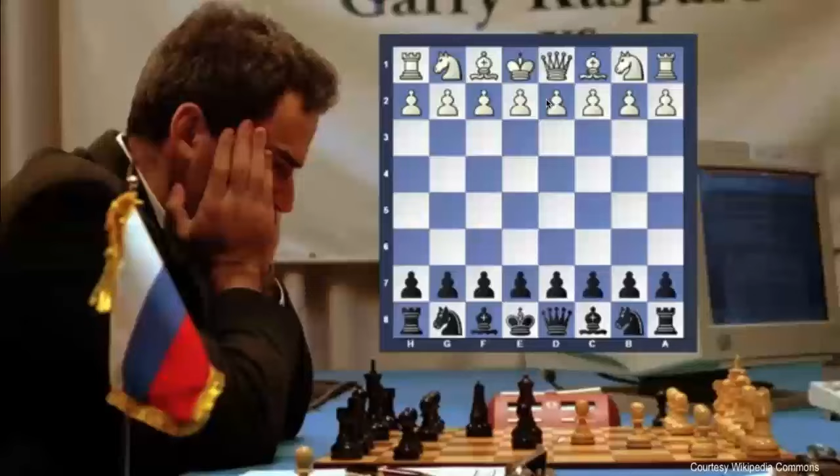Just wondering if anybody recognizes this gentleman. I would be very surprised. So let me give you a little bit of a hint. This is the same gentleman, and now we have a little bit of context. You might have figured this out. The setting is 1997, and a very significant match between Garry Kasparov, the then world chess champion, and IBM's Deep Blue computer.

To me, this was a very significant event because, as many of you know or could guess, the outcome was that for the first time in history, a computer defeated a chess world champion in tournament play. What that really meant to the computing world was that we now had a new respect for the power of the computer. Up to then, everybody understood that computers were good at math and could do repetitive tasks, but I don't think many people gave the computer credit for being able to accomplish things that required any form of creativity or thinking. I think this event really changed the mindset of a lot of people in that regard.

But I'd really like to give IBM a little bit more credit than what the documentary did that was entitled Man versus Machine, because in truth I see the IBM side of this, or the Deep Blue side of this, as a very strong collaboration between the IBM programming crew and the hardware team. So I think a better phrase would be man and machine.

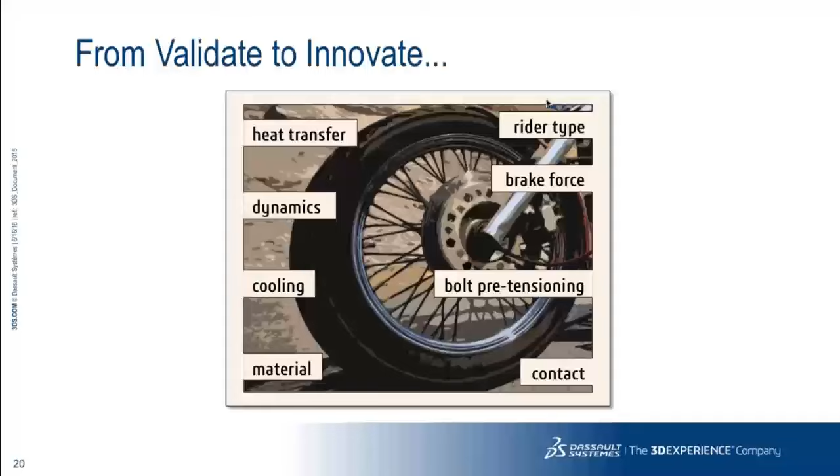We're using Abaqus to study the heat transfer, looking at the cooling, the brake force, the loading—all these different aspects of the design, simulating the performance. But we're also studying things like the warranty; we want to understand the warranty exposure with this design. We want to look at weight and cost, and the manufacturability of this. We have all of these features we want to study, and we can do all of that manually.

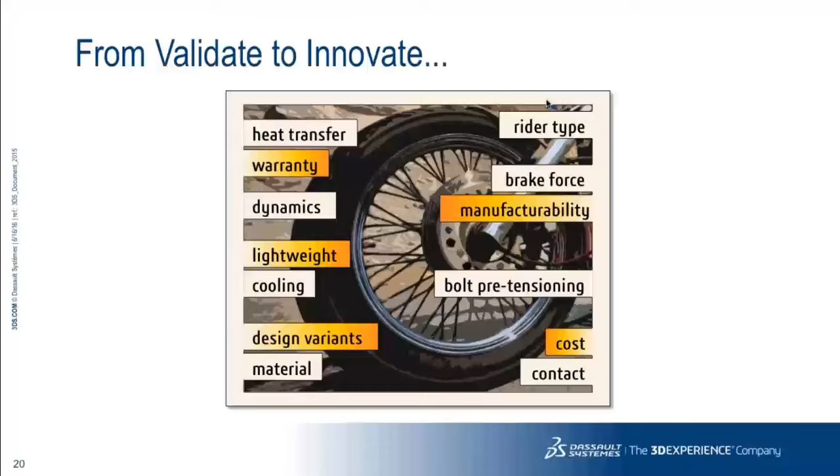What we really want to be able to do is look at all of these aspects of the design quickly enough that we can pour through many, many designs searching for that best design. That means we really have to begin to look at automated processes and other ways of getting through designs very quickly and efficiently.

So we'll be looking at using Abaqus as the foundation of the physics, and we're going to look at Abaqus and Friends to try to improve the throughput of the simulation.

In the video, we've actually made good use of the products: Abaqus for the physics, Isight for process automation, process integration, and parametric optimization. Also FE-Safe for the durability calculations to make sure that we have a robust product that will serve the intended use. And we'll also explore how we use Tosca for topological and shape optimization as well.

So those 4 products are going to be highlighted here, and they're special in another sense because if you have extended packaging, you already have access to all of those products. Abaqus, Isight, Tosca, and FE-Safe all draw on the same interactive tokens or compute tokens for solving, so they really share a pool of tokens.

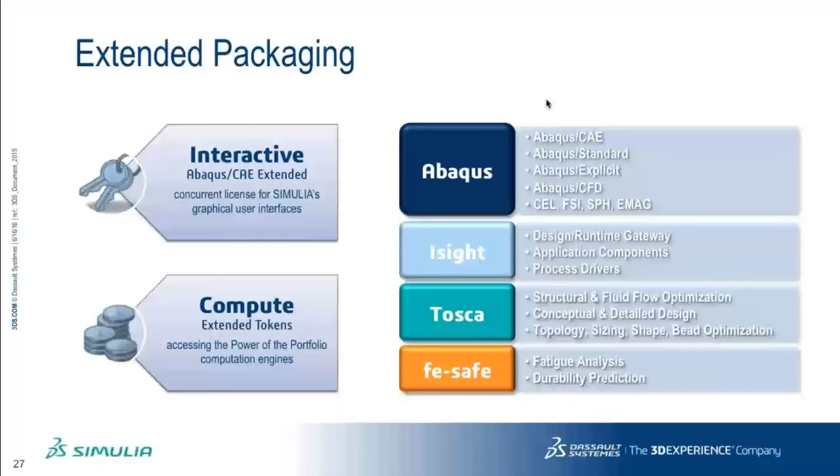As I said, those of you who have extended packaging today already have the ability to make use of all of these products. So now we're going to walk through in order Isight, Tosca, and FE-Safe and how they've contributed to developing this brake rotor.

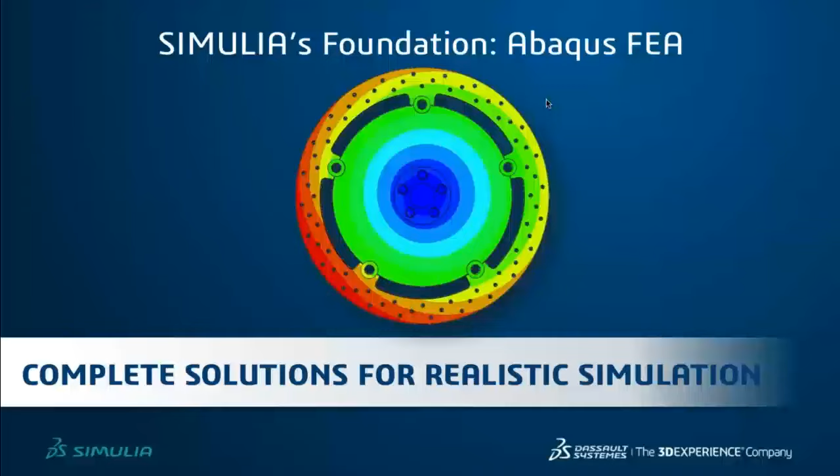So beginning with Isight, in this part of the development, what we're going to do is look at the brake rotor, the brake disc, the outer portion of it. We're going to use Abaqus to basically do all of our simulation, and so we've developed a model of this within Abaqus CAE.

Some of the components: we have a carrier that essentially supports the disk and is essentially attached to the wheel. And then also notable is the fact that there are 5 buttons that actually are the only way that the disk is attached to the carrier, and that's to allow for thermal expansion differences between the 2 pieces.

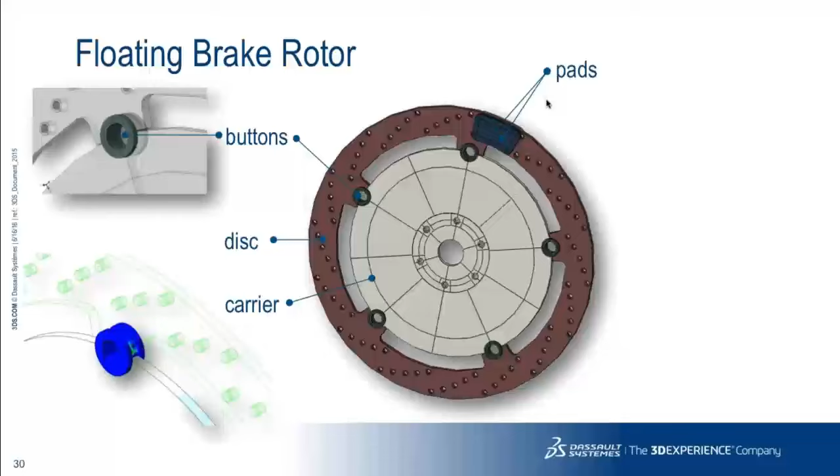All of the torque is transmitted through there, so the contact is an important part of that to provide the torque transmission and really to secure the pieces. So we have that as an important part of our design consideration. The brake pads are what's producing the drag on the disk to slow the bike down.

In running the simulation within Abaqus, what you will see is that we have switched the frame of reference, whereas normally the pads would be held still and the wheel and disc and carrier would rotate. In order to visualize easier, we're going to actually change the frame of reference to the disc and carrier so it appears that the pads are actually rotating around the system.

So you'll see that throughout this presentation. It's really just so that it's easier to see the results of the simulations. In the upper right corner you see a structural model of this, and it's showing the asymmetrical loading that's occurring.

We're also looking at the vent holes and doing a thermal simulation because we're also very concerned about the performance of the disk. We'll study that in more detail.

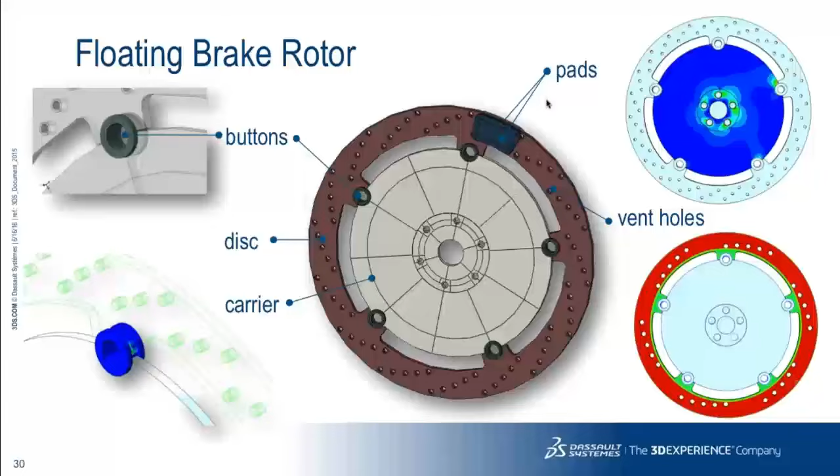Now, what we would like to do is to be able to look at many different variations of this design very quickly and efficiently. So we've created a Python script that will automatically create the model within Abaqus CAE. A fairly common way to do this would be to just manually go in and create this disk in Abaqus CAE and then use the replay file as a starting point for your script.

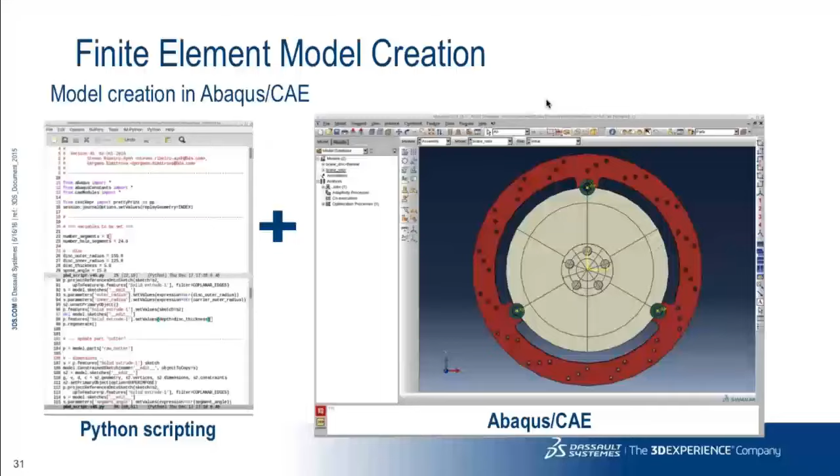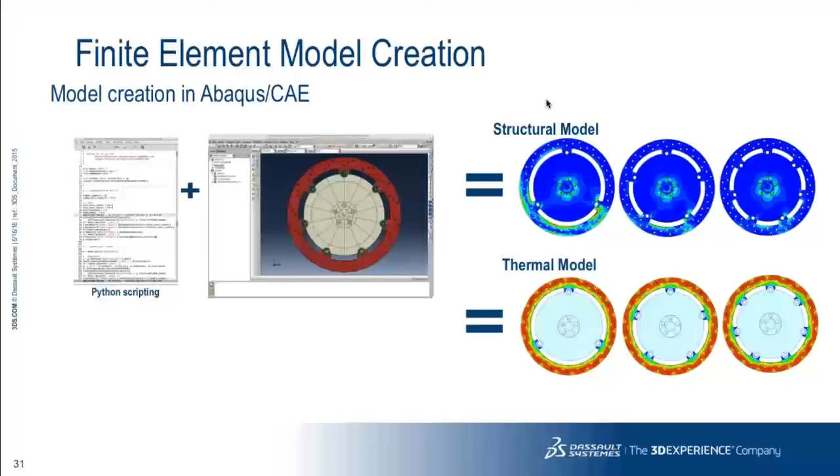Once we have the script in place, we're ready to essentially automatically generate a structural model and a thermal model by running that script. We can run it multiple times and look at different designs in 3-button, 5-button, 6-button configurations. We can really look at any number of designs that we want. So we've essentially built the foundation for automating this process.

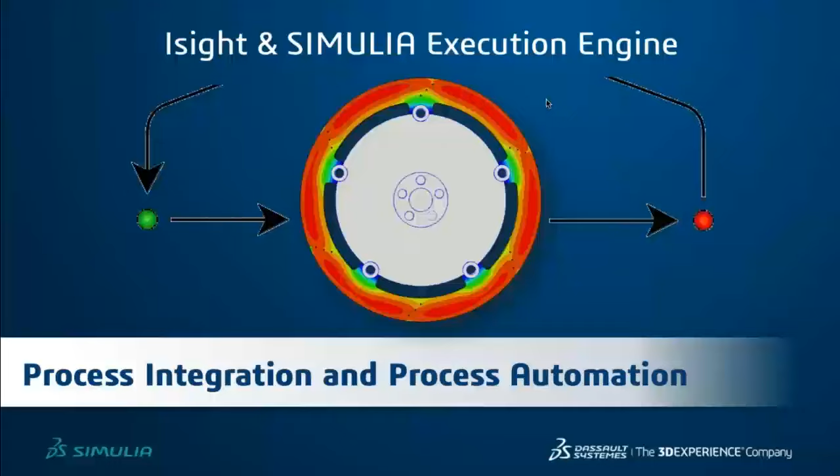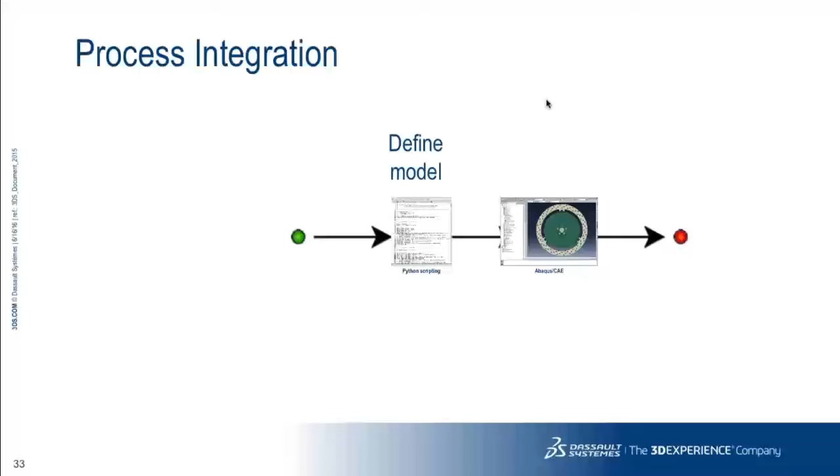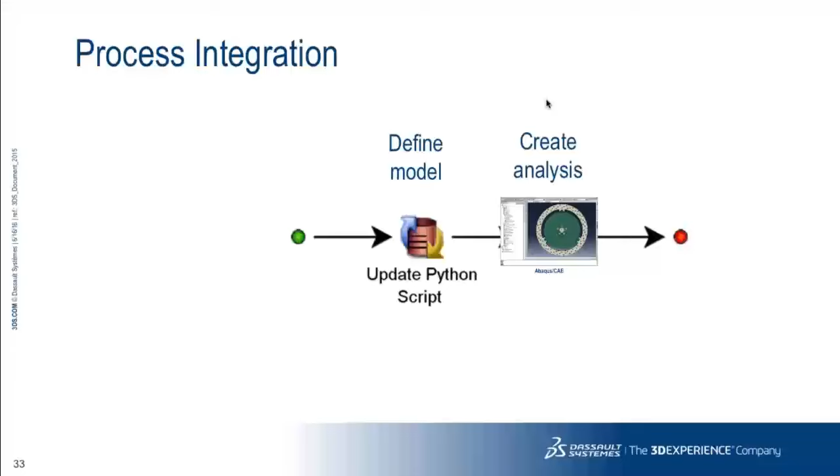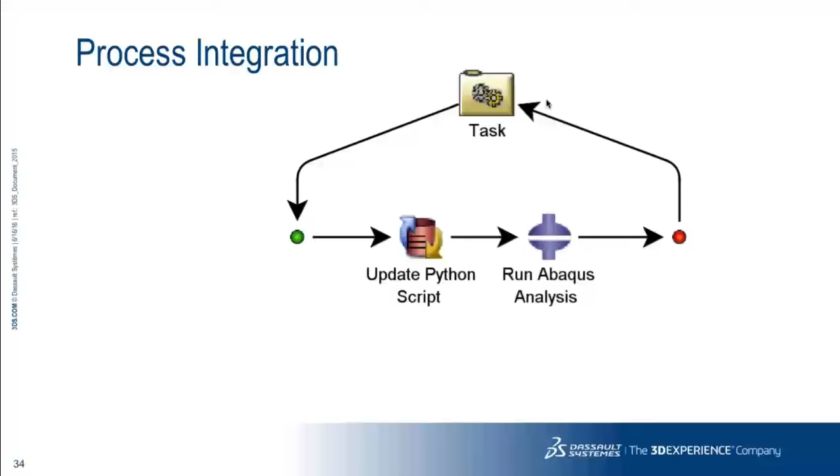So now we will employ Isight together with our script in the Abaqus CAE interface to begin to automate this process. Where we have the Python script that defines the model and Abaqus CAE to create the model, we're going to bring these into Isight and simply replace the Python script with the update Python script component in Isight, and Abaqus CAE with the run Abaqus analysis component within Isight. Then we simply bundle that into a task, an automated task within Isight, and that essentially allows us to automatically generate all the designs that we need.

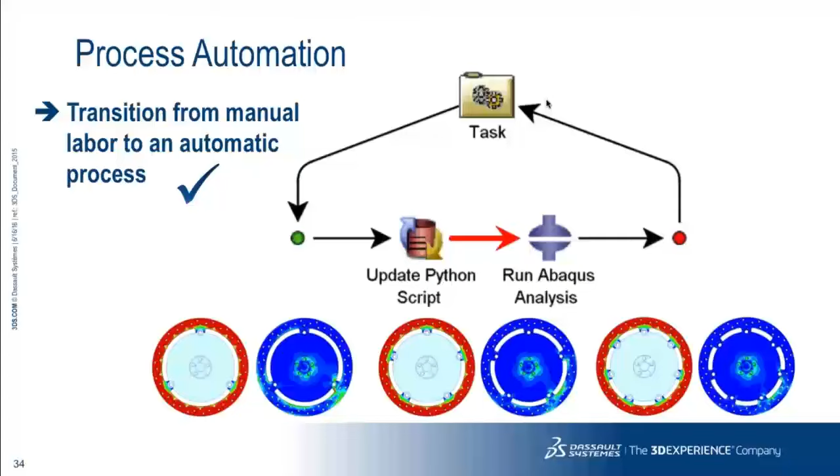So that can just essentially, without user input, we can generate any multitude of designs that we need. But we want to have a little bit of intelligence incorporated into this design process, and so we're going to use the optimization algorithms within Isight.

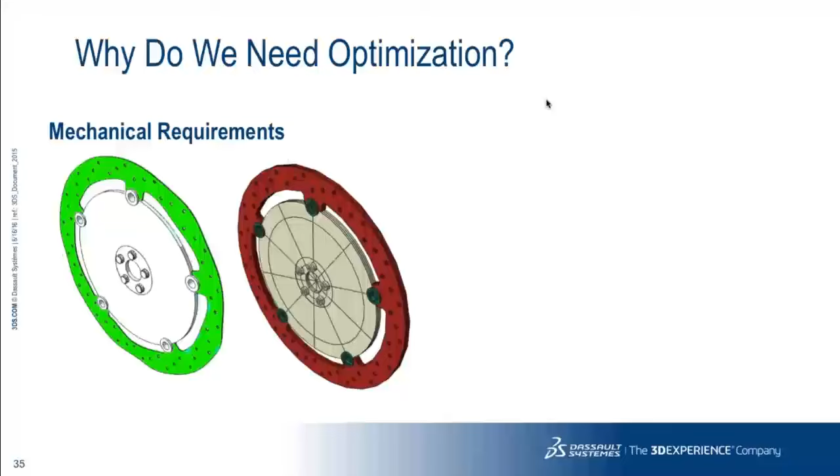I think it would be easy for people to say, why do we really need optimization? But its purpose is to help us balance competing objectives. For instance, in terms of mechanical requirements, we want it low cost and low weight, but if we go too thin, we risk having a disc that's going to warp or fail prematurely. If we make it too thick, it's heavy, more costly, and not an attractive design.

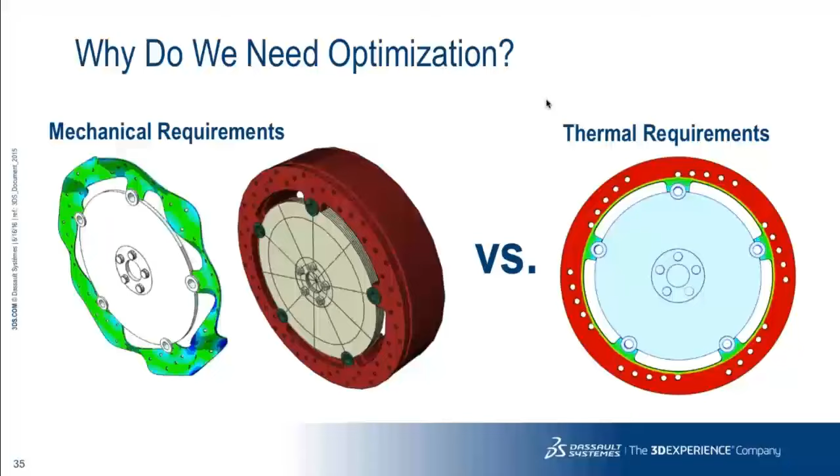So we have this delicate balance that we need to strike, and we can use the optimization algorithms to find that perfect balance. In terms of thermal requirements, we have similar problems. We need to look at how we best configure the holes and how we meet the objectives needed for the design from a thermal standpoint. So we have the ability to look at both mechanical and thermal requirements as we develop the design.

With the mechanical and thermal requirements in mind, we can start to look at different variations of the geometry. We can look at different sizes for the holes, a different number of holes, and a different pattern or position for the holes. So we have these many different possibilities that we have to sort through.

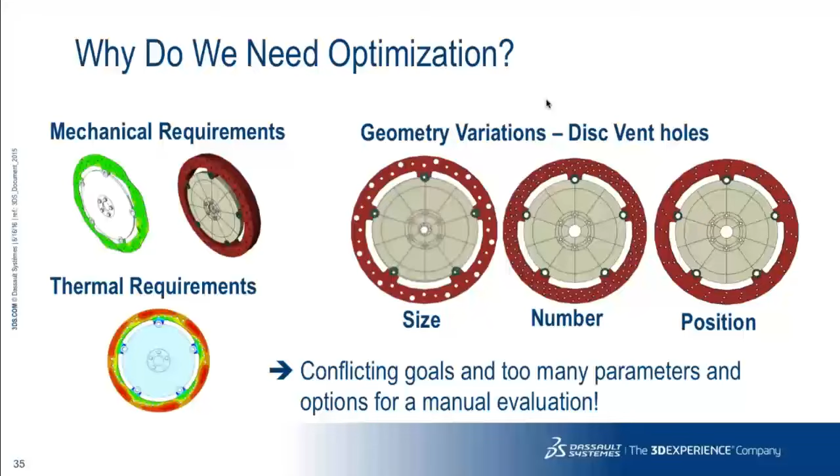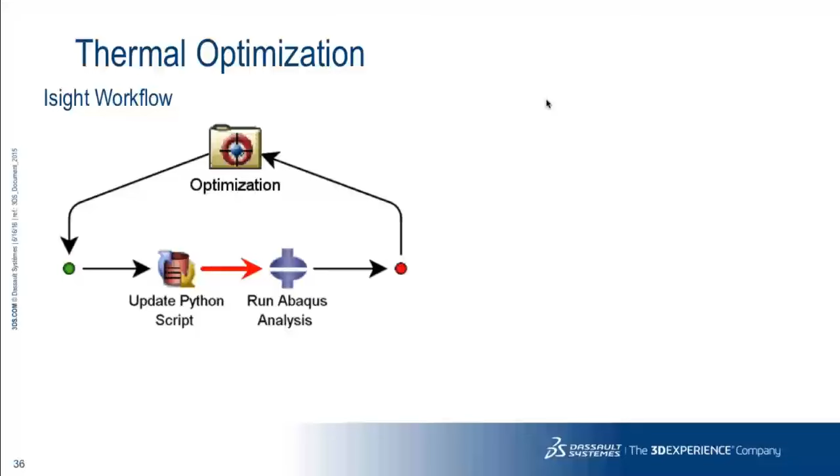Very quickly it becomes a challenge to manage all of that information manually, both from a file management standpoint and just in terms of keeping track of results. So what we're going to do is introduce our automated process and simply replace the task component with an optimization component. It's very simple to turn that automated process into an optimization algorithm that will move the design toward improved mechanical and thermal functionality.

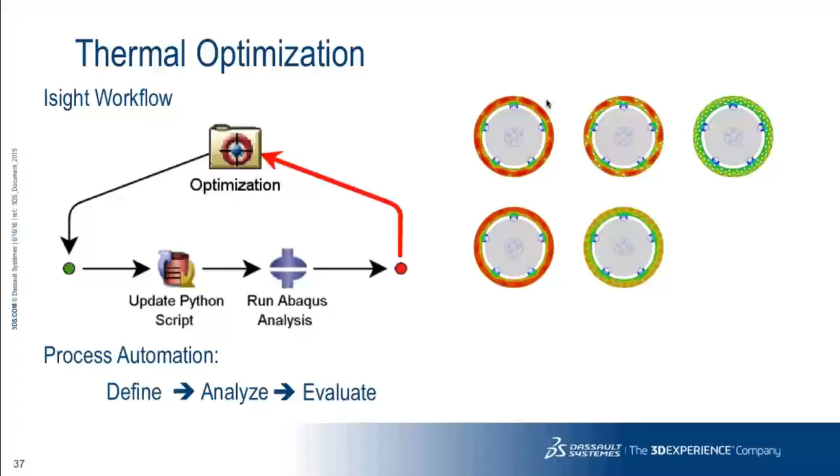So we use that to automatically drive through a number of different designs, looking at results from different hole size, pattern, number, different thicknesses, and all different variables of the design. And then after we've produced a number of designs and run through the analyses, we want to be able to quickly identify which of the designs is our best option.

Isight gives us many different tools to post-process that information. For example, in the correlation table we see here, we're able to look at the way the number of holes correlates with cooling area. What we see is a positive correlation, basically saying that as we increase the number of holes, we increase the cooling area, and that's a favorable trend.

But if we look at the number of holes versus brake area, we have a negative correlation, which is understandable. As we increase the number of holes, we reduce the braking area. So we have these competing objectives that we have to make sense of.

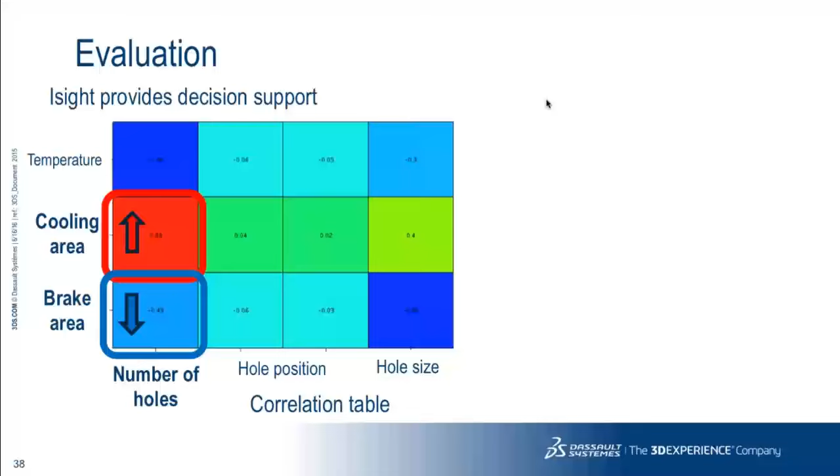So we look to a different type of post-processing within Isight to help us further, and that's a scatter plot. In this scatter plot of all the various designs considered in the design process, we can look at brake area on the y-axis and cooling area on the x-axis, then look at different regions of this plot and rule out the lower points that represent insufficient brake area. After removing those points, we're very quickly able to find the optimum point where we have acceptable brake area and the maximum cooling area.

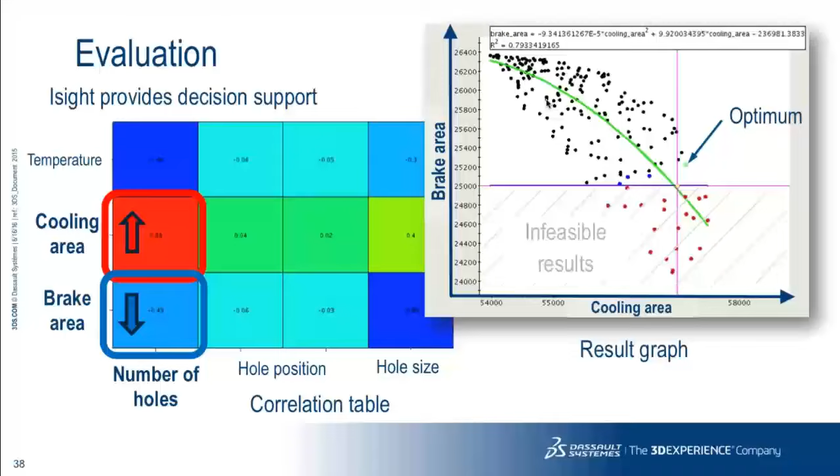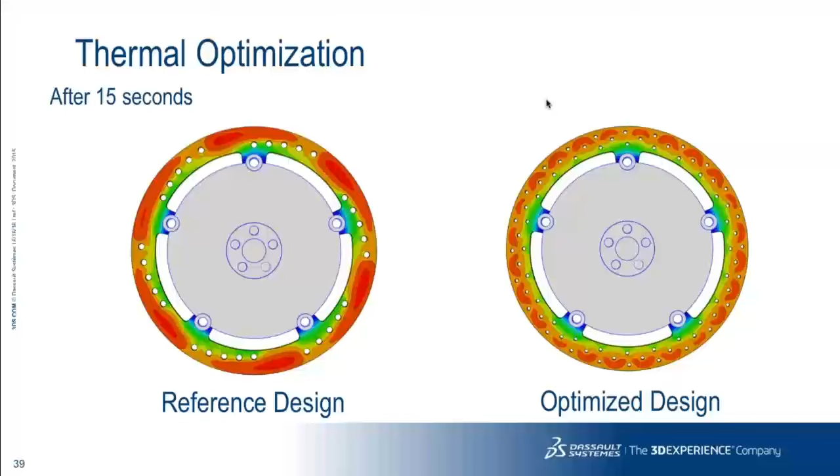What we see is in the reference design that was originally recommended by the designer, we have points of high temperature, whereas those corresponding points in the optimized design are at significantly lower temperature. We also have local hotspots in the reference design which contribute to warping and other undesirable effects, whereas in the optimized design we have a much more homogeneous distribution of temperature.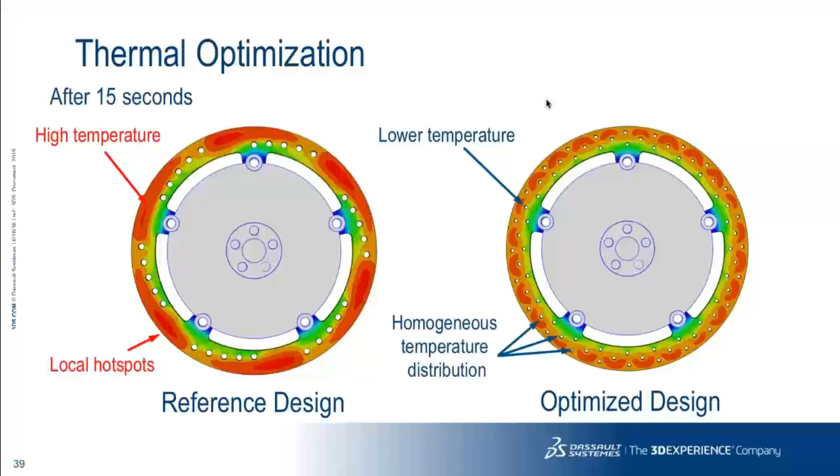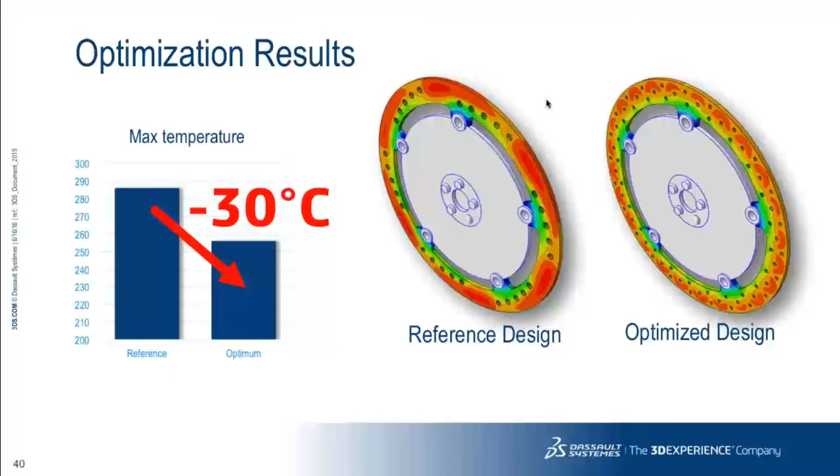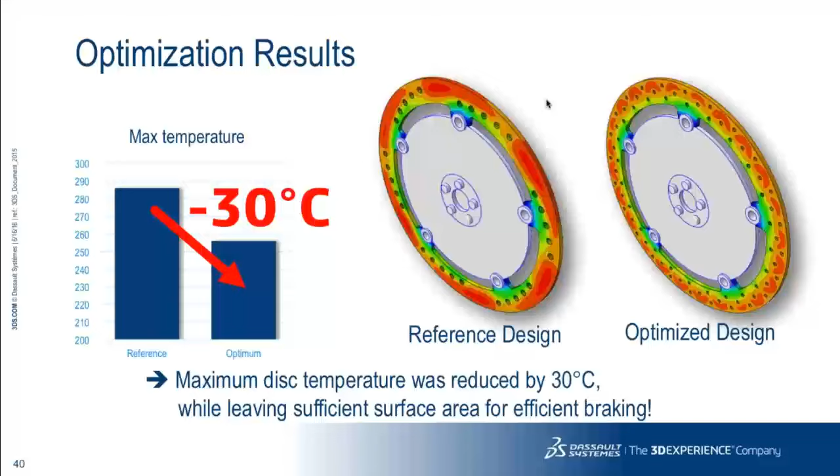In summary, by taking advantage of the optimization algorithms and searching through many different designs, we were able to drop the maximum temperature by 30 degrees centigrade while maintaining sufficient braking area. So these are the types of things we can do using optimization algorithms coupled with process automation that can go through many design increments at the same time. This is the brute force method that the computer can employ. It can look at everything and find the best option.

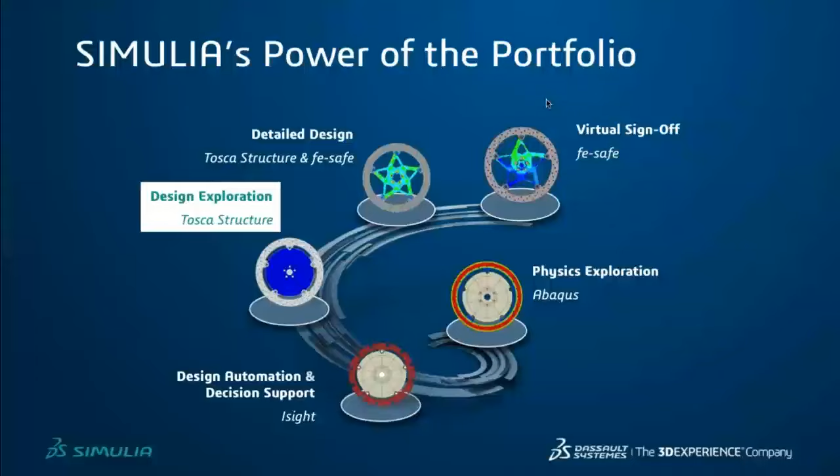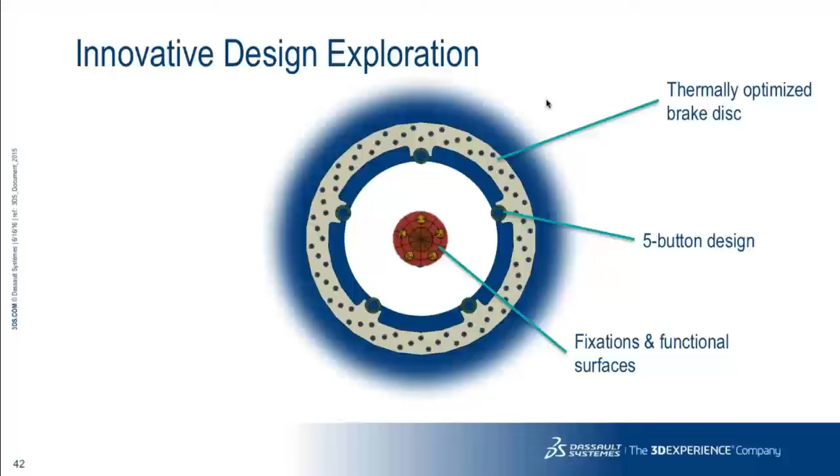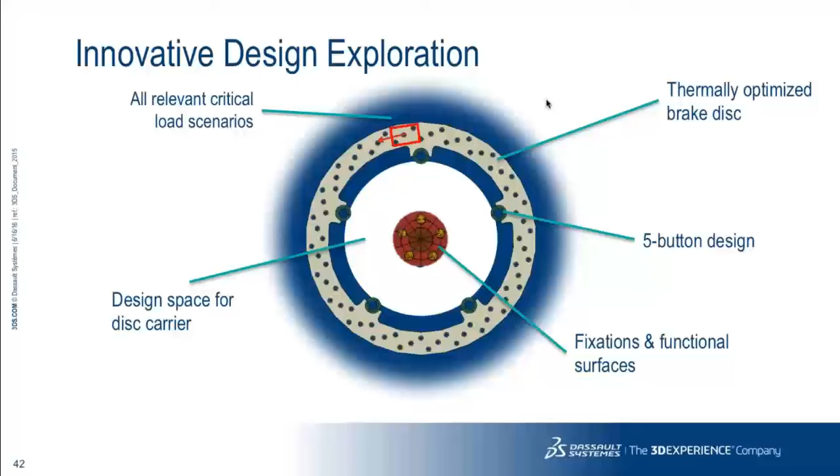Now I'd like to move on to the process we used to come up with the carrier design, and we used Tosca for that. At this point we have an optimized brake disc - we just went through that, and we chose the 5-button design as the best option. We know that the carrier is connected to the wheel at certain locations in the center, and we understand the loading coming in through the brake pads and the brake disc. So what's left over is the design space in between the two, which is what we have to work within to come up with a carrier design.

For that we're going to use Tosca and employ a technique called topology optimization. This uses simulation technology, the machine part of it, where algorithms can find designs that are very efficient in terms of using stiffness and stress well, combined with the engineer's input that sets up all the boundary conditions and gives us the real estate available for the optimization to occur in. So it's really a good picture of collaboration between man and machine here.

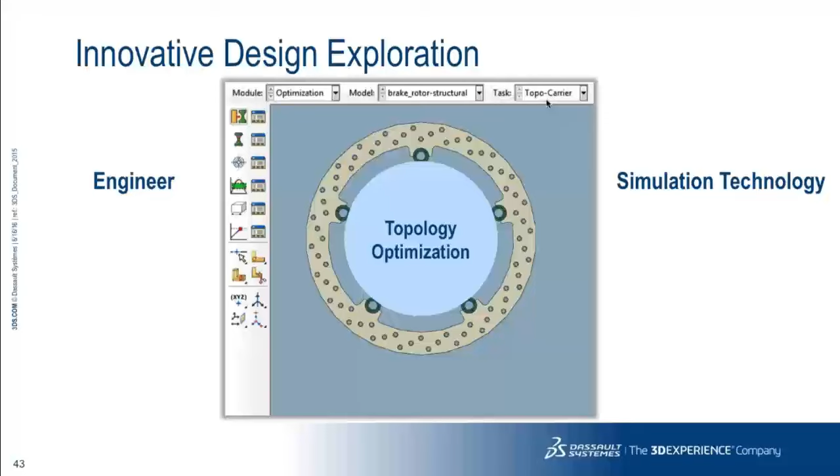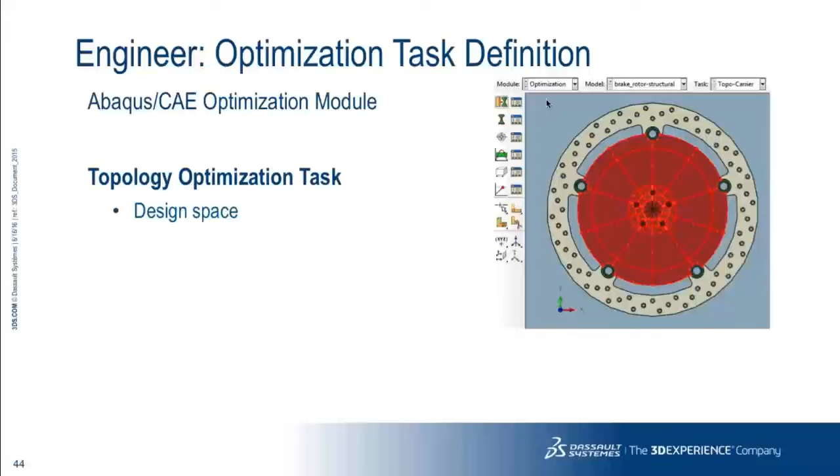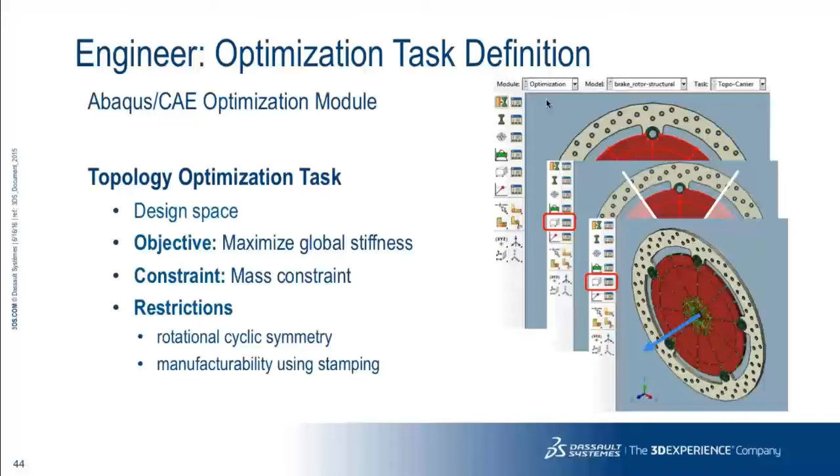We'll take that into Abaqus CAE to set up this optimization, and that task consists of specifying the design space we have to work with, and then defining the objective - what are we trying to accomplish in this optimization? Here we'd like to maximize our global stiffness, and our constraint is to reduce the mass and make this a lightweight component. But at the same time, we're also able to impose other restrictions within the optimization process to make sure we have cyclic symmetry in this case, or also to make sure this is manufacturable through a stamping process. So we have the ability to impose these manufacturing and design restrictions in the process as well.

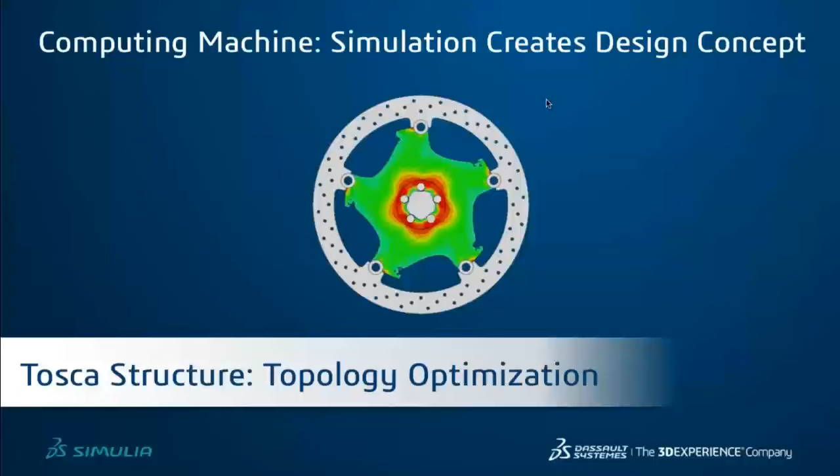Once we have that set up and begin to run the analysis, that's when the magic really happens. What Tosca does is it looks for material within that design space which is not being utilized and simply removes it. It results in the shape you see here, which initially is not what we probably would have come up with in our minds, but after reflecting on it, you start to realize that it really does make sense. That's a common occurrence with topological optimization - after the fact it makes sense, but it's rarely what you would have imagined ahead of time. That's really the power of Tosca and topological optimization.

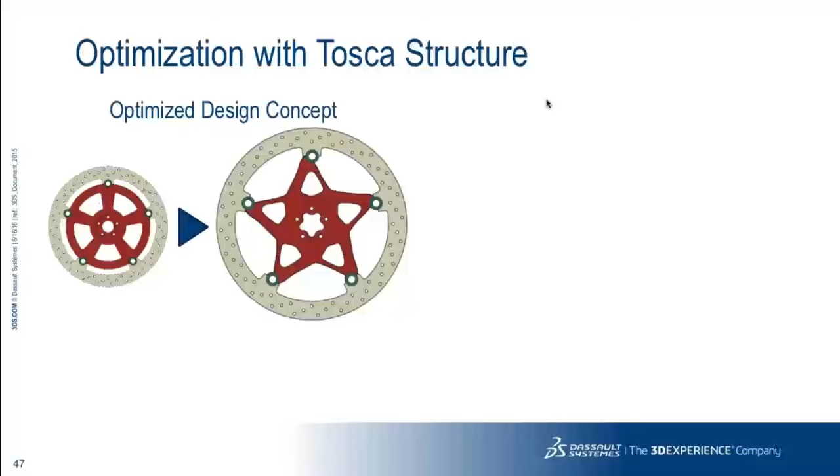So basically what we've done here is moved away from the traditional design for that carrier. We've used Tosca to come up with this novel design based on algorithms that make strong use of the material, and the result was a weight reduction of 30%, while at the same time it's actually twice as stiff as the original design. So we've really demonstrated the power of the algorithm here.

Now, one thing I want to point out is that with Tosca, the optimization is based on nonlinear results. The simulation behind the scenes is fully nonlinear analysis, and that's critical because it allows you to respect the difference between tension and compression. There is no way to carry tension between the button and the carrier, and it's important that we respect that, because when we use linear results, we're basically tying the two together, and as you might imagine, it then relies on tension between the carrier and the button, which is just not realistic. So it's critical that you have the opportunity to use nonlinear capabilities within your development of a design, especially where contact is involved or any large displacements.

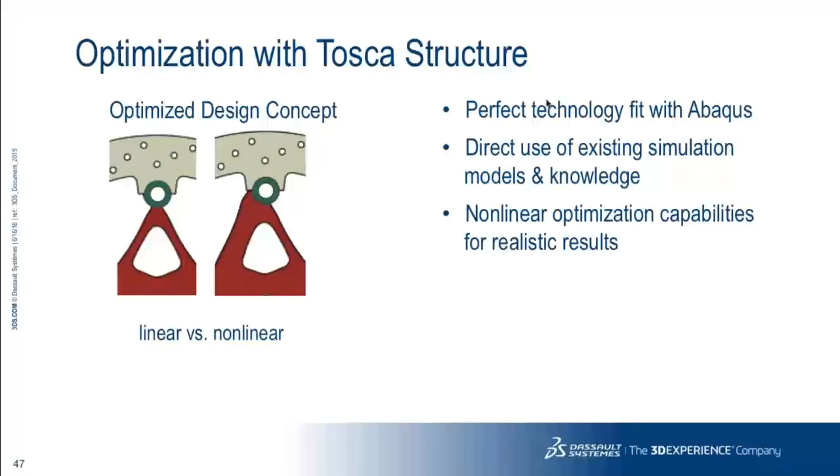It's really the same as choosing to use nonlinear analysis in any simulation versus linear analysis - you understand the limitations of linear analysis, and those apply equally to topological optimization. And then finally, we also have a design that we know we can produce from a stamping process, so we've covered that as well.

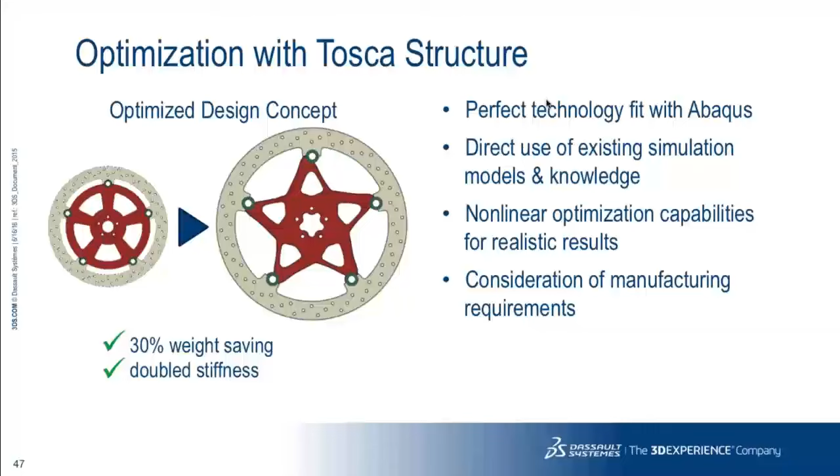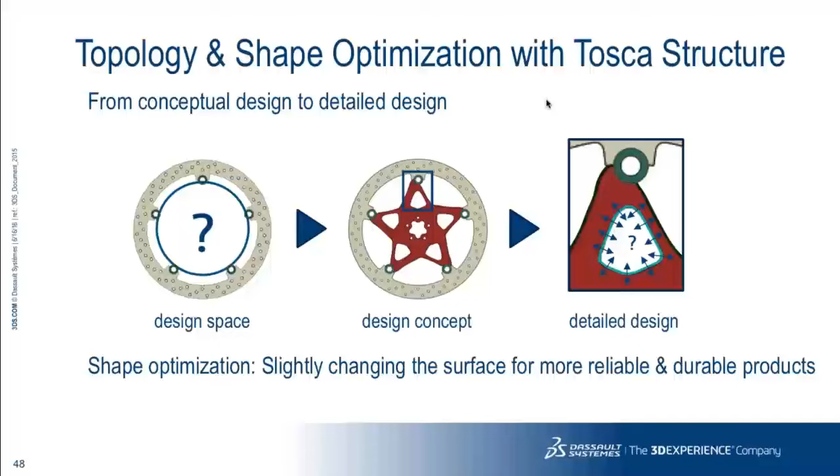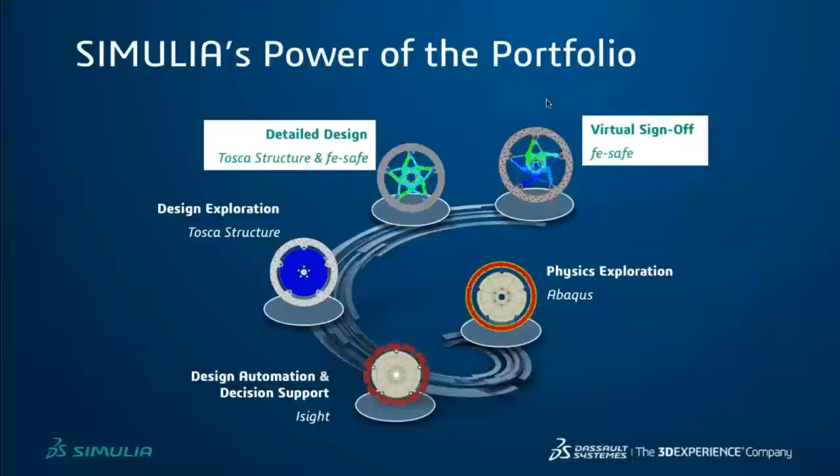So just as a review, we essentially started with a design space. We said this is the real estate that we have to work with. We used Tosca to come up with the design based on stiffness, but we're not done yet, because we want to continue looking at the detailed design and make sure we have not only the right stiffness, but a durable design as well. That takes us to the next step, where we'll use fe-safe to do a durability assessment of the design. Actually, it's even better than that — we're going to use Tosca in combination with fe-safe.

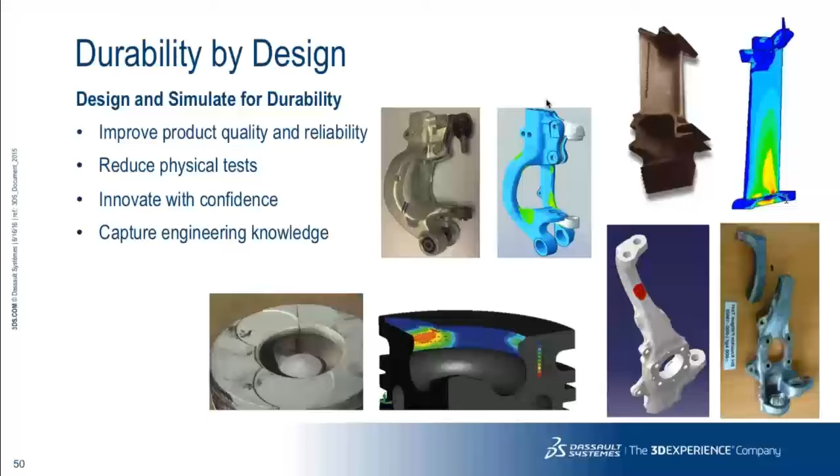But let's first talk about durability. What we're shooting for is to make sure we have products that have the life our customers expect, that we have quality. We want to minimize the warranty claims that we have. We want a design that's robust under any number of conditions, and that really points to doing a fatigue assessment of your designs.

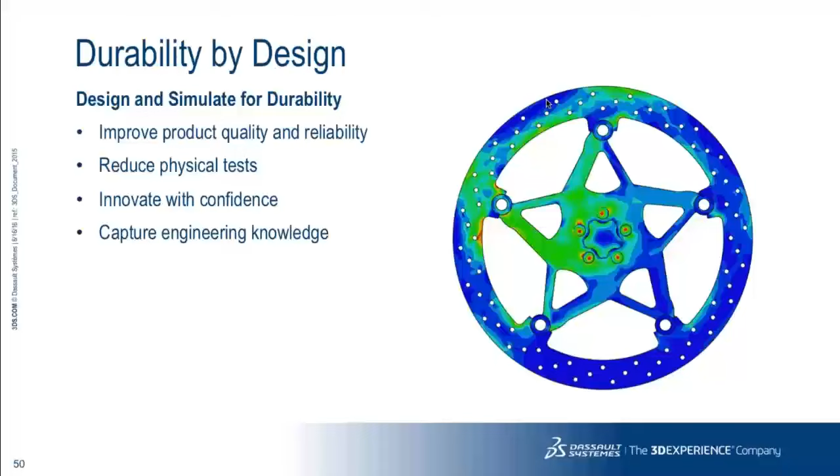Now, an important thing to note is that fatigue is the result of a local stress value, and this is where shape optimization really becomes a critical part of the life prediction process.

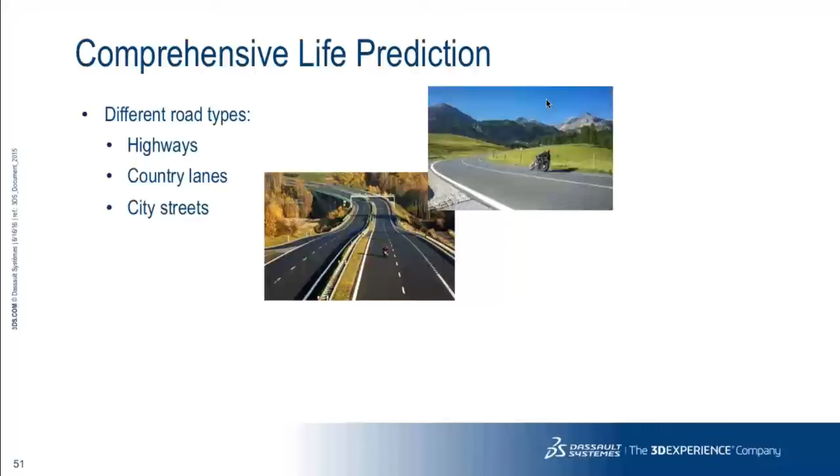As we predict life, there are a number of different factors we have to bear in mind. First, for this brake rotor, the motorcycle is going to spend its days — some on highways, some on country roads, others on city streets — and those all contribute to the fatigue of the part differently, which we need to account for when predicting its life.

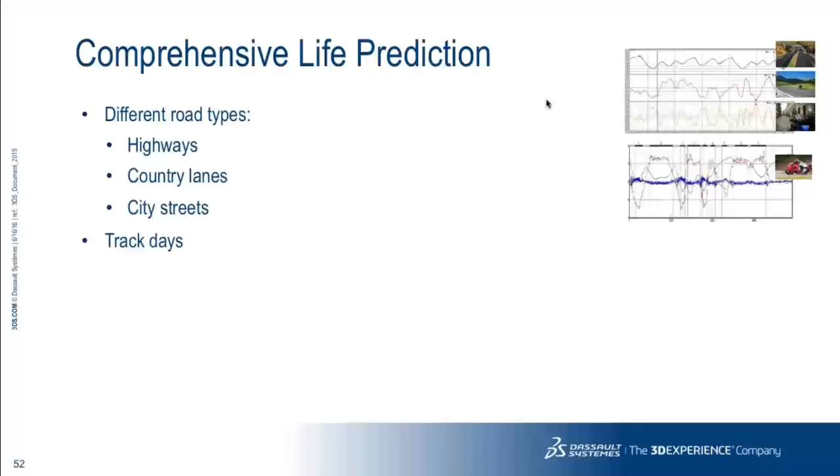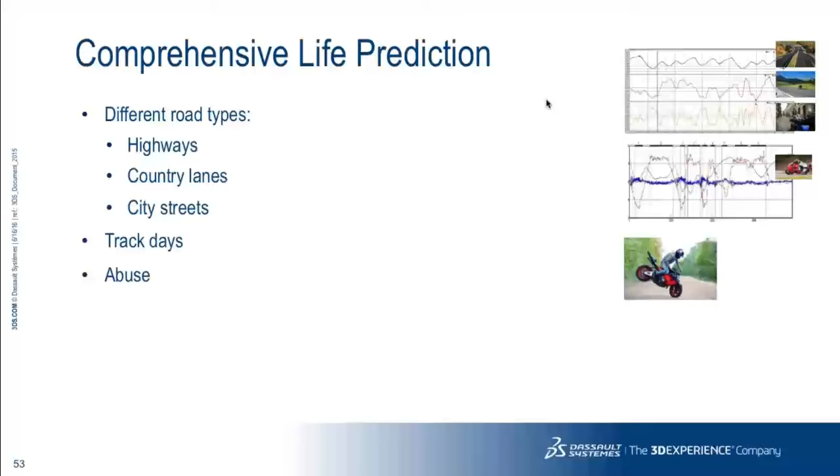We also may take this to the track only a couple times a year, but those are very damaging events — they have such significant loading that they also have to be considered in predicting the overall life of the part. And then there's the impact that other non-intended use might have on it, since we're again trying to contain warranty costs.

We also have touring bikes and sport bikes, and different types of customers, and the way they ride will impact the life of the parts. We want to use that information to understand what the service life should be given these different conditions for different riders and uses. We can essentially use FE-Safe as a tool to help make estimations of the service life we should expect from that product under those circumstances.

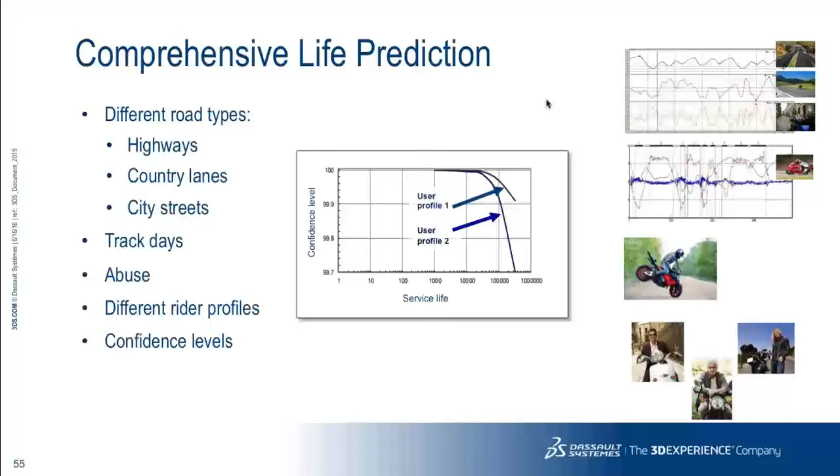So in the brake rotor, what we've done is combine FE-Safe, the fatigue life prediction tool, with Tosca Shape Optimization. Let me pause for a second and point out that we've really employed three different types of optimization today. Let me revisit that.

The first was Isight, which we used for parametric optimization. That means we had design parameters — those might be fillet radii, thicknesses, geometric parameters, material constants, or anything that's a specific number in the design. We can adjust that; that's parametric optimization.

We also used topological optimization, which we saw in Tosca when designing the carrier. That's essentially a free-form design approach that looks for unused material and removes it from the design. That's the second form of optimization.

The third form, shape optimization, looks specifically at the surface, because fatigue typically initiates at the surface, at surface stresses. So we look at the surface and make very modest changes to its profile in an attempt to enhance the life of the part. That's a nice partnering of the fatigue prediction capabilities of FE-Safe with the shape optimization capabilities of Tosca.

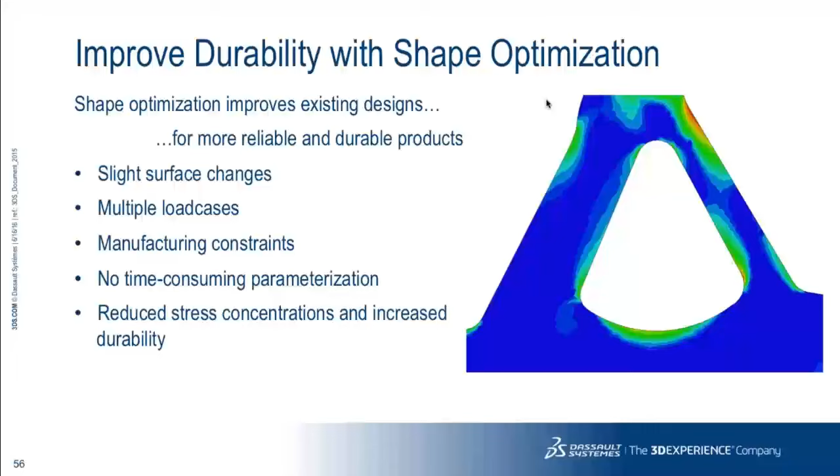So we've looked at the carrier design now using shape optimization to try to reduce stress concentrations, and in doing that we've come up with the new optimized design — and it's almost hard to see the difference in shape.

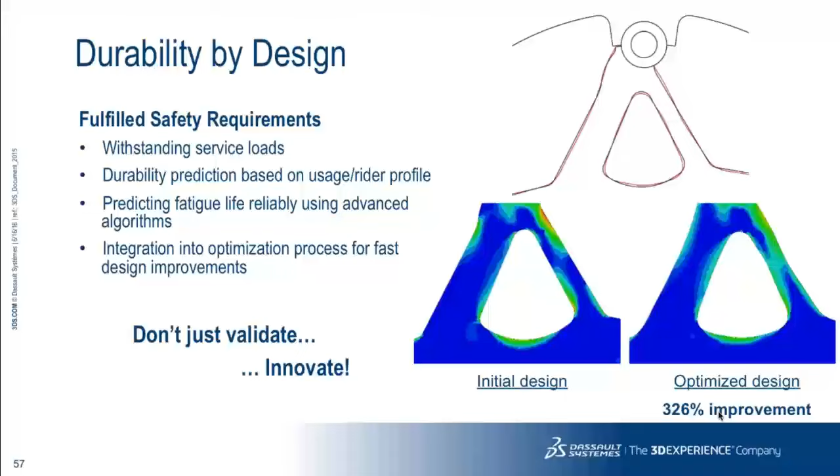And so that's a process that FE-Safe and Tosca work together very well with to really drive innovative designs for you.

So just to wrap up, in summary, we talked about how Abaqus is the core, the foundation. It provides the realistic simulation, the accurate physics behind everything. I think we're all very familiar with that. But we also looked at Isight, which provides the process automation and process integration, and it also allows us to do parametric optimization.

And then we looked at Tosca, which drove the topological optimization of the carrier for us, gave us this unique star-shaped design. We also used it to help us with shape optimization to improve the durability of the design, and it did that in conjunction with FE-Safe, which was providing the life prediction for all of the design variations that we looked at.

So that's really kind of an overview: Abaqus, Isight, Tosca, FE-Safe. They've all four contributed to this innovative design process, and they're also all available to you, accessible to all of you that have the extended packaging today.

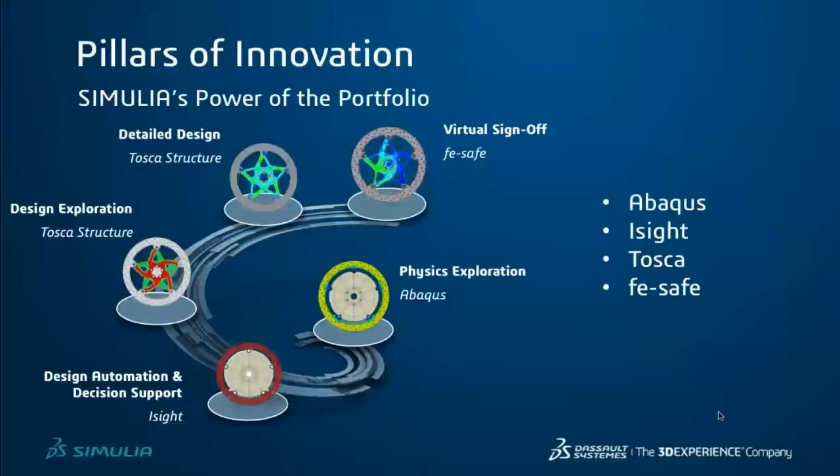So that's really kind of the story of moving from validate to innovate. And as I said, key is to tap into the power of the computer. Make use of that. Be the IBM Deep Blue computer beating Gary Kasparov. Innovation comes by employing that power and actually using it in the design process. That's really a necessary part of innovation.